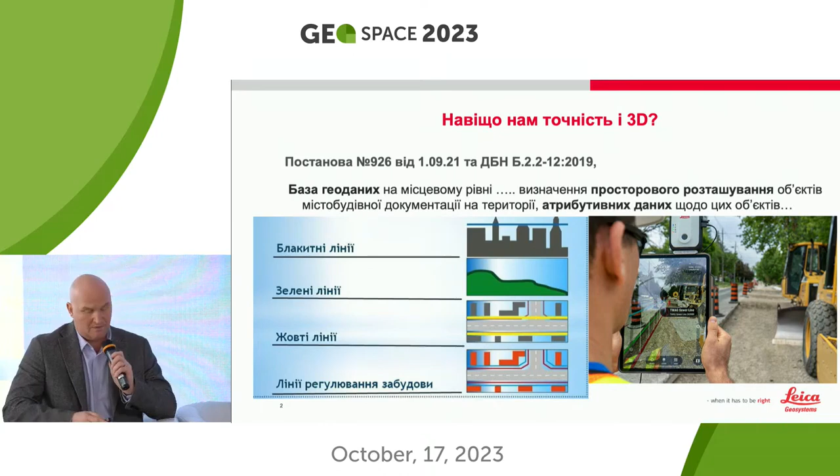So use of modern technologies can help us in this. Let's begin with exactness. If we need to do this work, we have to think how exact it should be done.

Modern methods like the RTK network System.NET consist of more than 280 stations and use any systems of coordinates available. It's a very exact system for getting geospatial data. We are now testing this network to look at its level of exactness.

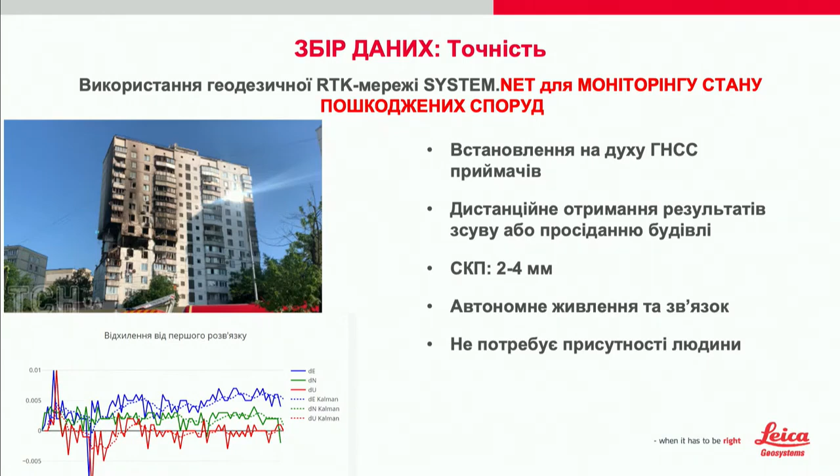If, for example, a building was damaged, we can monitor its movement with exactness up to 4 millimeters. This system is installed on the roof, and then in remote mode you may identify the movements of this partially damaged building.

Now I will tell you how to quickly get data which may later be used for urban development documentation. I mean laser scanning. It could also be acquired in automatic mode, but in our current situation, this work was done 6 years ago, before the war.

A lot of work was done with this equipment, which is also present at this conference. You may see it, it is really operational, and the use of this technology is very interesting because first of all it speeds up the works. If you need to scan facades of buildings on the street, the speed could be from 40 to 80 kilometers per hour.

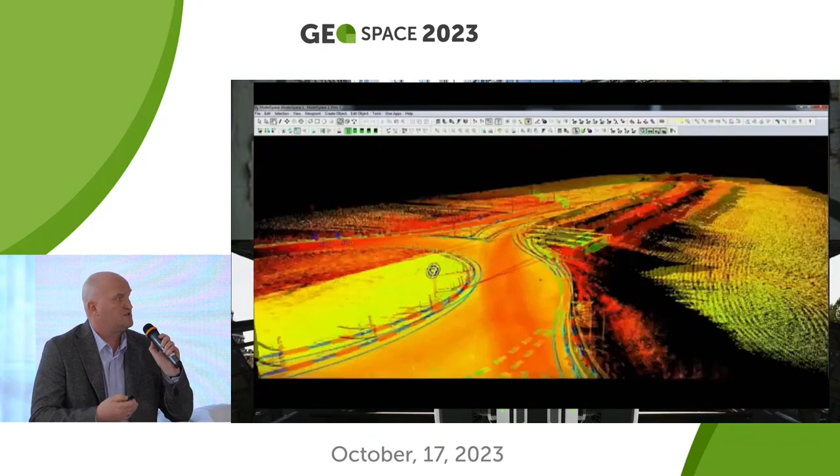After that we may get data which could later be used for filling our geospatial database. Here you can see what a person sitting in the car can see. This system functions independently of the car itself.

After the field work has been completed and balanced using the network of land stations, we may get a cloud of dots, and later this cloud of dots could be brought into the system of coordinates, and this way we may get the data which we need for designing.

These are the main benefits of use of 3D scanning: its mobility, as well as the opportunity to get panoramic photos, because there are cameras on all sides. This is the town of Irpin before the war, and you may see the trees over there.

If you do it from aircraft or UAV, the trees will not allow you to see smaller details because they will be covered by trees. But with the laser scanner, you see everything which is under the trees.

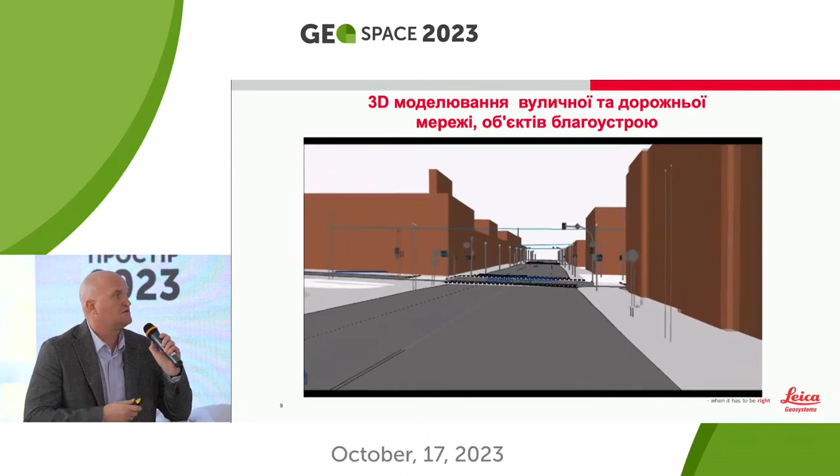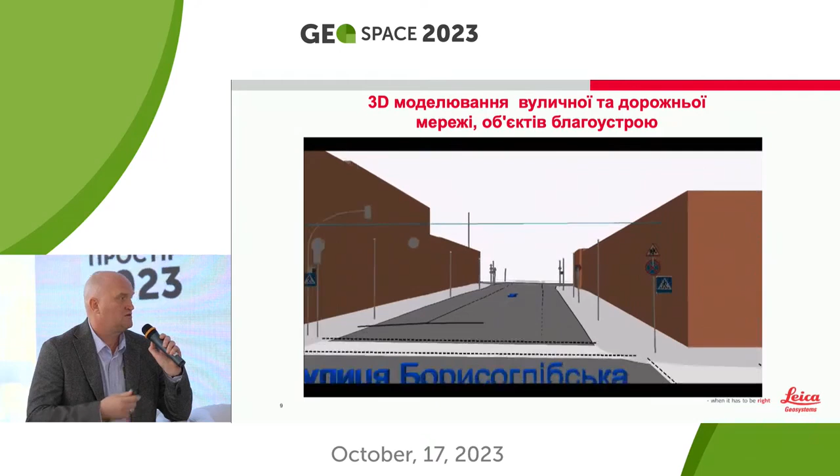And especially now during the wartime, you cannot use UAVs everywhere. Here you see how, with the help of dots, you may see signs on the road, lines on the road, in order to model the transit through the city, and traffic signs which may be used in the city.

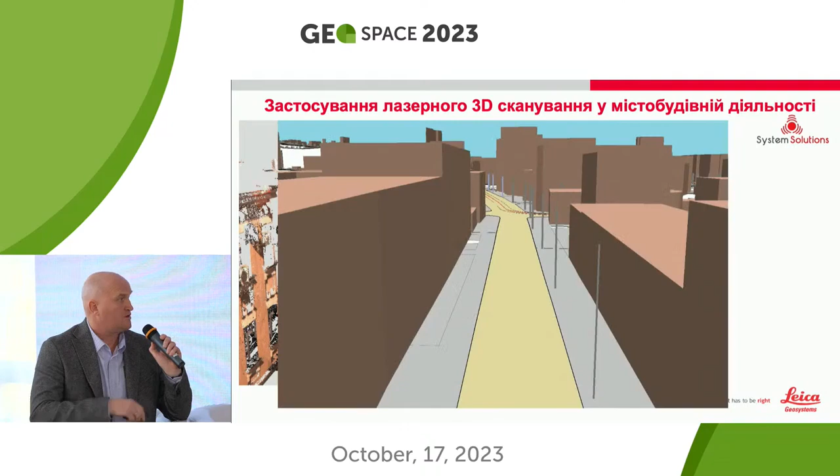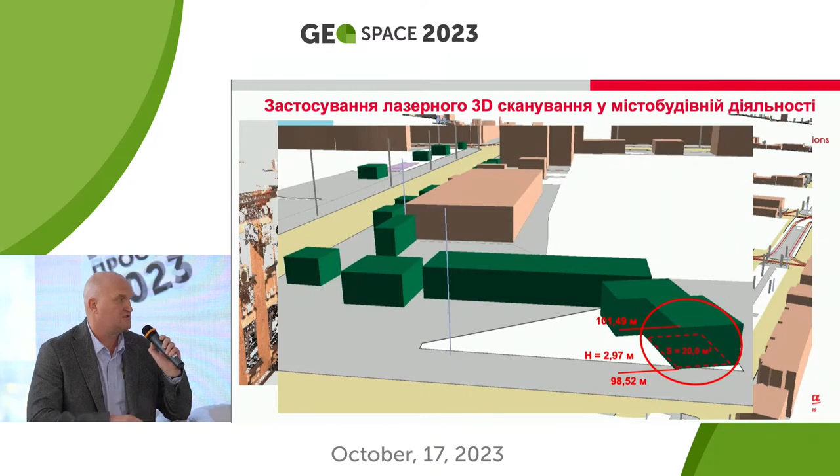And after the cloud of dots, we get these images which can be used for identifying territories. So in conclusion, you may use for cartographic materials 3D objects monitoring and passportization of facilities in the city - it's a cloud of dots.

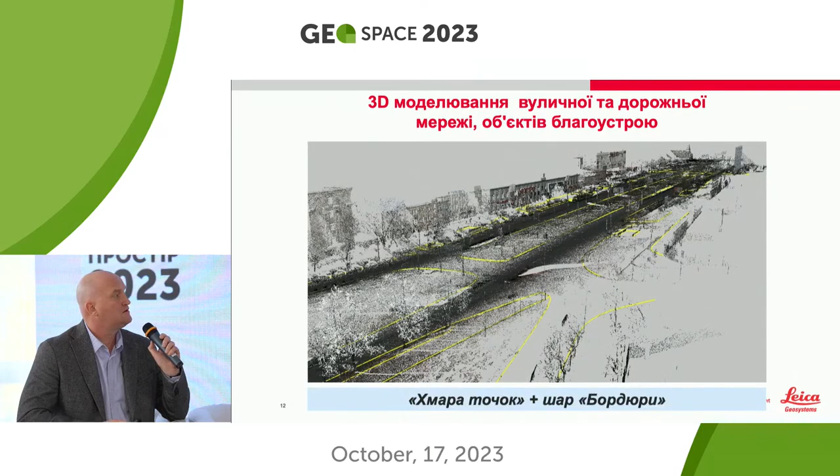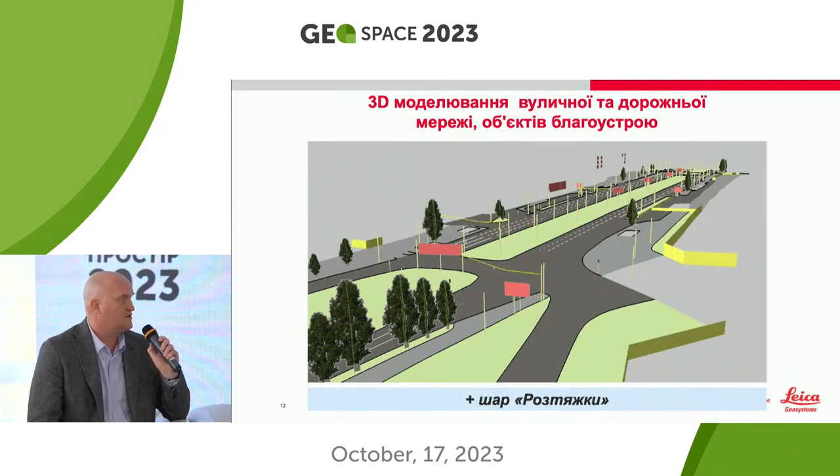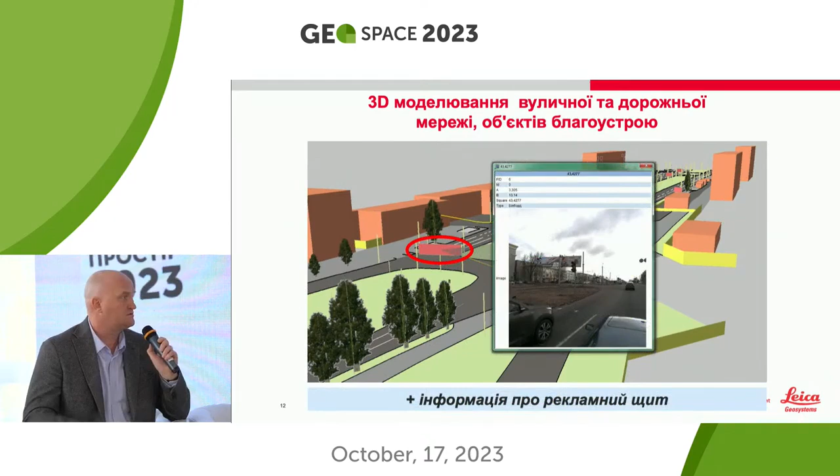This, for instance, is Moscow Avenue in Kharkiv as a point cloud. Then the layers are worked out and put one on another, and this way you build the Geoinformation system, which then gets attributive data on the objects you can see there. All this could be done without leaving your office, and you can get it very quickly nowadays.

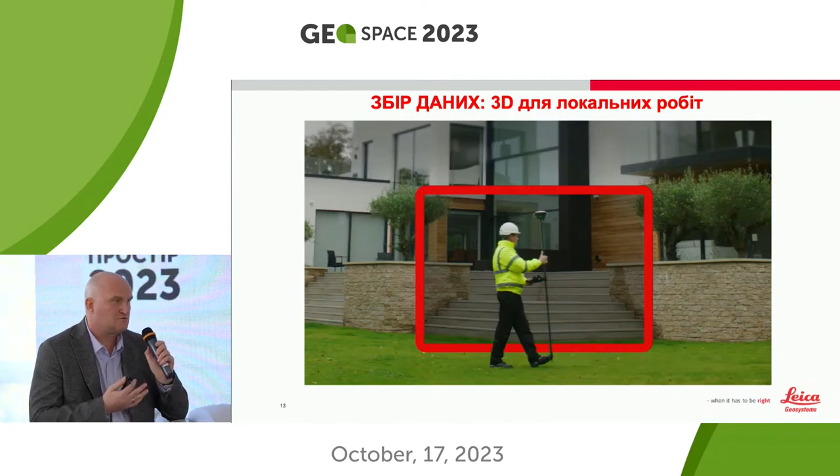Another example of data acquisition is the combined method using GNSS receivers if you need to do some local works, using a GNSS rover with a photo camera, and measuring points using visual positioning. You may get a 3D model and then do the work you need. Images are processed immediately after capture.

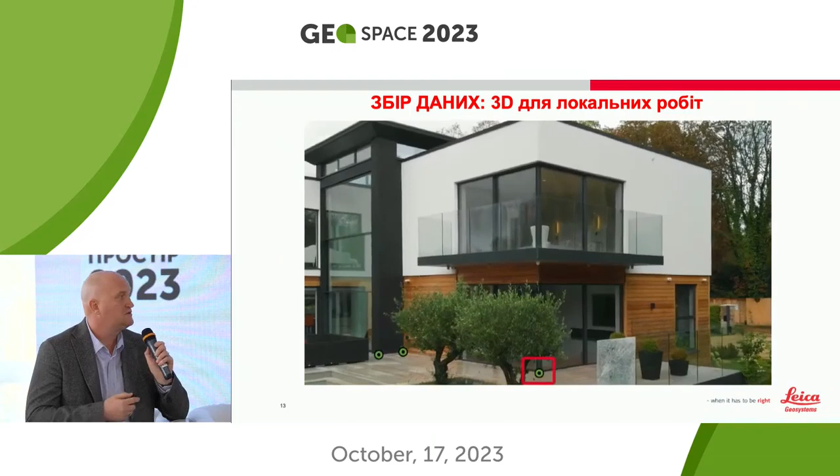These are the new methods which can be applied now, and they are not very expensive. That's it.

Thank you, Volodymyr. And I would like to add that now discussions around the quality of urban development documentation involve an interesting solution offered by System Solutions using the camera on the car. And the problem of different quality characteristics is raised.

So any urban development, at the moment, should be based on the plan of red lines. And in my opinion, this is that scheme which should be presented with the best possible exactness, because this may lead to various property conflicts and so on. So in my opinion, this is a very good thing from the point of view of money efficiency and how to quickly create the foundation for red lines in the urban development documentation.